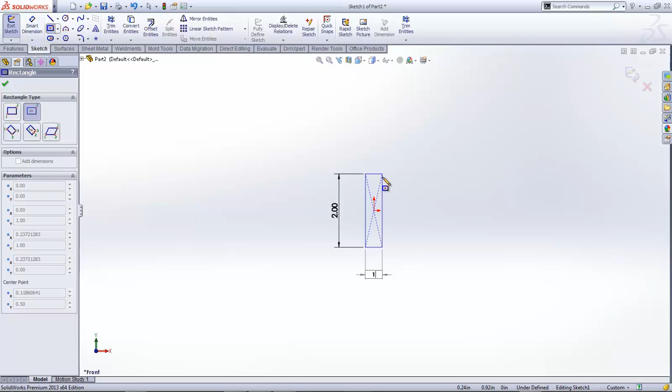So here we are in SolidWorks. I'm going to go in and start creating these profiles. So we're just going to sketch the profile first. The first one we're going to make is the 2x1 that's 1/8 thickness. So I'm just going to sketch a rectangle profile. And when you do this, you're going to want to make sure that the origin is in the middle. It just makes things easier.

When you do weldments, you want to make sure that you always go in and add more points. So when you are making your structural member, you have a lot of different points that you can put the profile on. So I'm just going to drop in some points here, and you can see I'm putting them in the midpoints on the inner rectangle and the outer rectangle, just to be safe, so I know that I have a lot of options here.

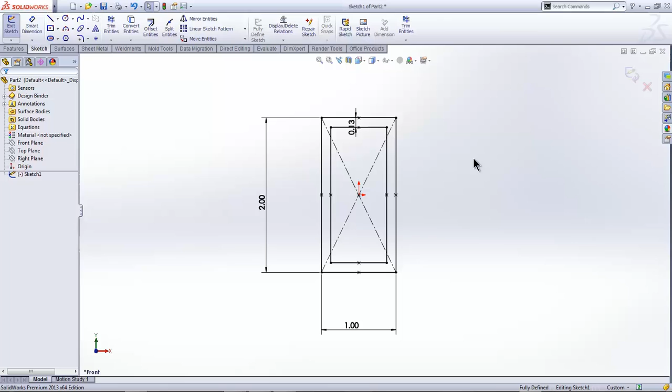Exit out of the sketch. And while I still have the sketch selected, I'm just going to save it real quick. What's really important is instead of a part, I'm going to make it a library feature part. Okay, so then you can save it to a folder location that you specify earlier. So I'm going to save this. I have a base frame, rectangular tubing. I have one made, I'm just going to overwrite it. It's very important where you place these.

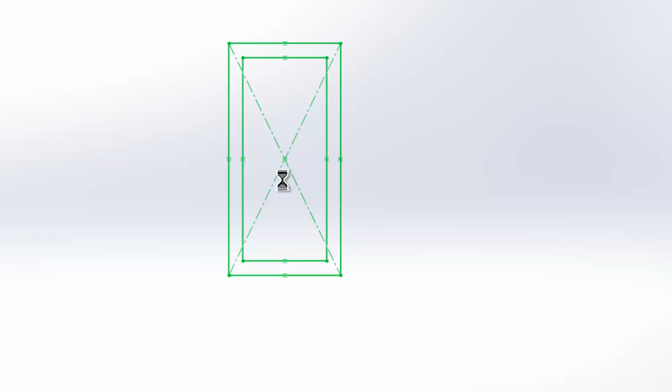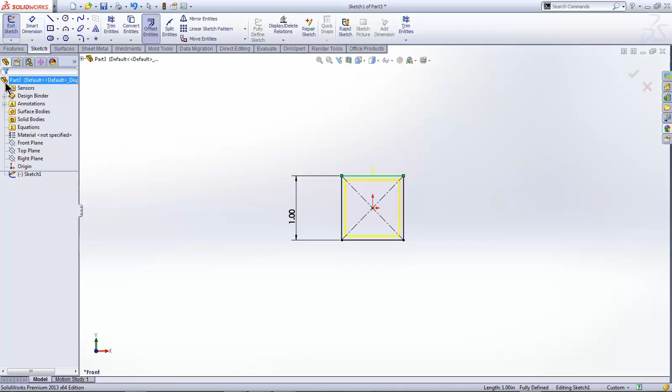So I'm going to start working on the 1/16 inch version as well right now. Essentially, when you make your file locations, you want to make sure that you have a correct folder set up. Basically there's the folder that you'll pick, and then from a drop down you can specify which folder. Then there's another drop down in the weldments that will also pick what type. So for mine it was rectangular, and then I can pick the actual weldment. So that's what I'm doing here: I'm just making these weldment profiles and placing them in a file structure that I've already set up before.

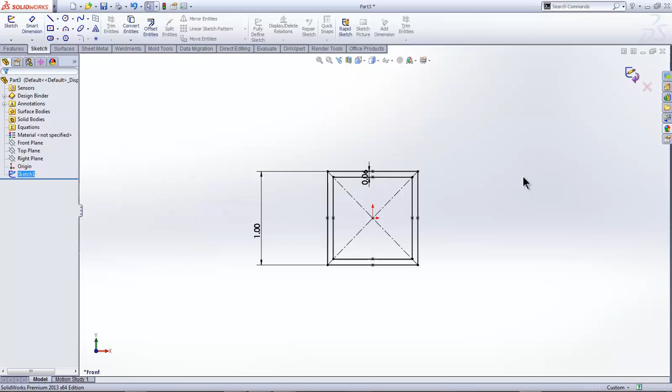So like I did before, I'm going to drop in these little points so that way it's easy for you later on when you want to drop these into your part when you're doing your weldments. So just like before, I'm going to select that sketch. I'm going to save this in the location that I did before. However, I'm going to make sure, since this is a square one, that it goes in the square tubing folder, not the rectangular tubing. So FRC frame profiles, base frame, square tubing.

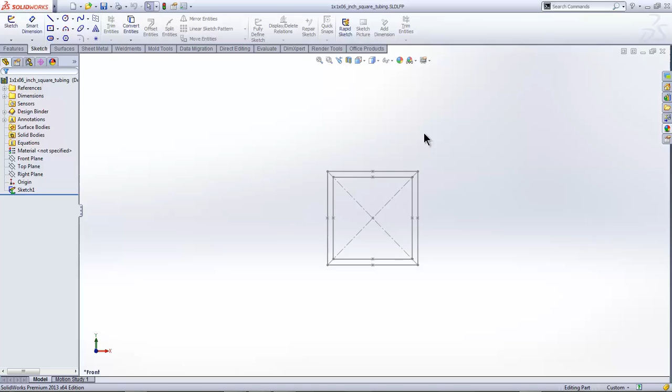I'm just going to name this 1x1, 1/16, just to make it a bit easier to distinguish between the profiles. And you can have lots of profiles in these folders. You're not limited to a certain number. You can drop them in, you can change them, you can have different versions. And this is what's great about weldments: it really makes creating a frame structure, especially in FRC, very fast and effective, and you can modify it with very little issues at all. And you can see that by the end of this tutorial I have an FRC frame that really only took me maybe 15 minutes to make.

So let's go setting up the file locations. If you go in, you'll need to make a folder system so that you can use your weldments properly. The first folder that I created was called FRC frame profiles. This is just where I can put all the different kinds of profiles I want.

In that folder, I'll have a base frame. Now this base frame has folders inside of it: rectangular tubing and square tubing. The individual profiles will go in either rectangular tubing or square tubing. This allows me to distinguish between them, and I can also even add more. Let's say I want round tubing or something like that. I can just make that folder, drop in profiles into the round tubing folder, and use them in weldments.

And then when we actually put our weldments in, we can drop down from the first drop down menu. We'll do base frames, and then we can determine which type of tubing we want to use. And then the last one's just picking what profile you want to use in the last folder. It seems a little complex, but if you set up a similar folder structure, then when you put your file locations in, you only have to do it once, and then it'll be there forever. And it makes it a whole lot more simple.

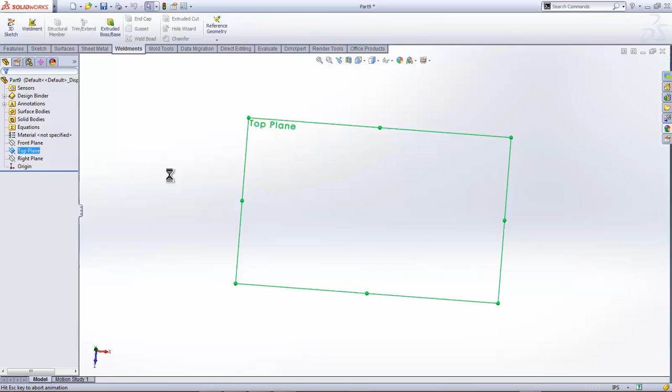So let's start creating the frame. So we're going to open up a new part here. We're going to set the units to inches. And the first sketch I'm going to do is going to be on the top plane. It's just going to be an outer perimeter of the robot. So I'm just going to drop in a rectangle right now and put some dimensions in. So we'll do 36 inches by 26. There we go. Alright, I'm going to exit out of the sketch so it shows the outer perimeter of the robot.

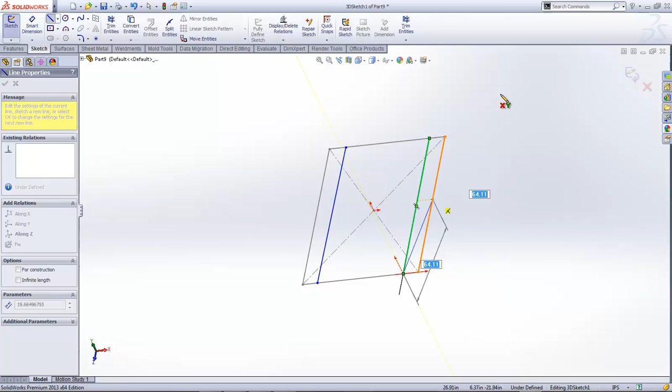Now we're going to actually make our 3D sketch. And this will be the actual frame pieces. So I'm going to put some vertical sides in right now along here. There we go. And we're going to use some of the 3D sketch relations. I'm going to click on these and I'm going to put them along the Z. We're going to dimension them away from the side, from the outer perimeter of the robot. Like that. We'll say about 3 inches on each side. There we go. Okay. Then we're going to drop in our front rails.

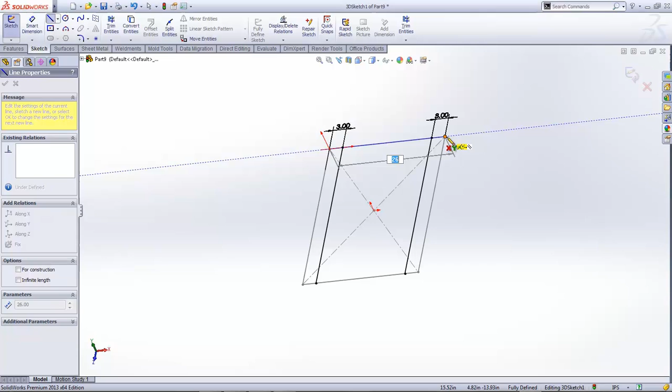I like dropping in these front rails instead of using sketch 1. It makes it easier for me to keep all the frame in one sketch, so that way I can just hide sketch 1 when I need to.

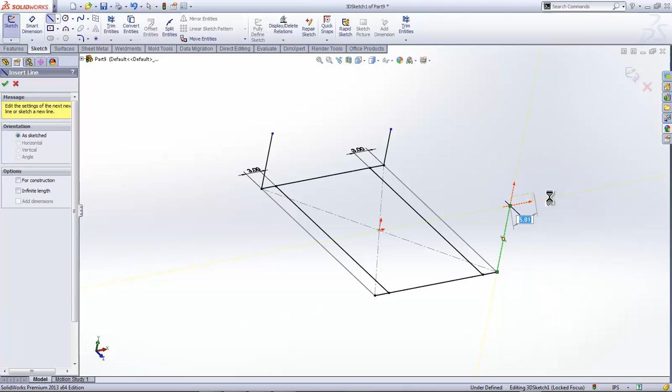Now I'm going to put in some vertical uprights for a second level. This could be for an electronics plate, going to the next level for some kind of mechanism, or it could just be the outer railing system for maybe a bumper mount system. You can do that as well.

I'm just going to drop these in. We're going to make sure that they're all level with each other, so just putting in some 3D sketch relations. There we go, last one.

I'm going to dimension these right now, give them a height. They're 10, so that's a little bit too big. We're going to change this to 5.

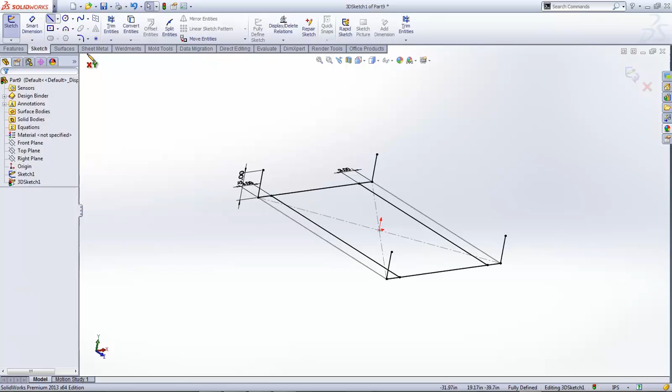Okay, so now our frame is coming along. You can kind of see a little bit of a skeletal structure of it right now. I'm going to drop in these sides. Right there, we go. Exit out of the sketch.

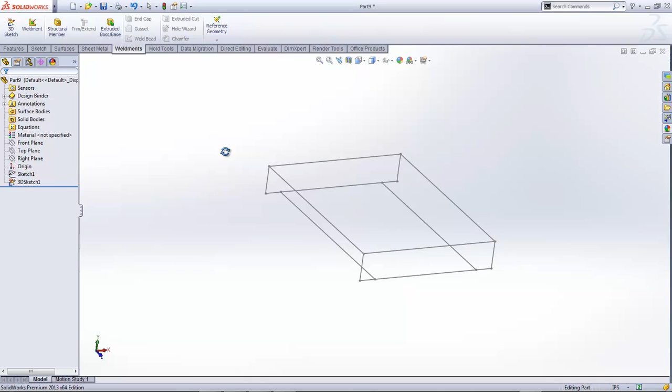Okay, so now you can see I have 2 sketches. One that's the outer frame perimeter, so I'm going to hide that. And you can see this is basically like a skeleton of the sketch.

So we're going to make sure we can see the weldments tab. We're right clicking and then selecting weldments. You can see that I already have the base frame selected, so I'm going to base frame.

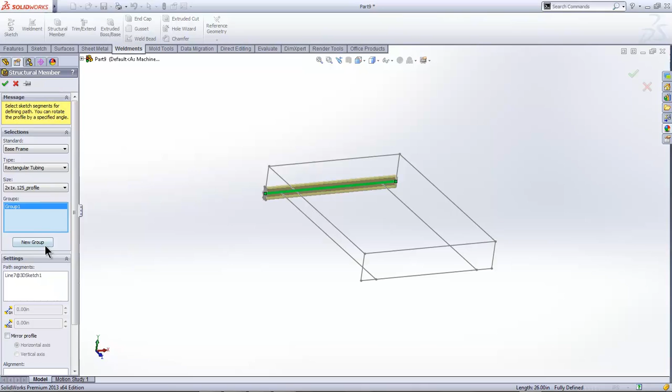Type rectangular. I'm going to use our 2x1 profile we made earlier. And when I click on it, you can see that it's already given me a nice little profile of what we're going to do. If I use locate profile, it'll allow me to actually pick one of the points we placed earlier, either a corner or midpoint, and that'll be where it sweeps down that line.

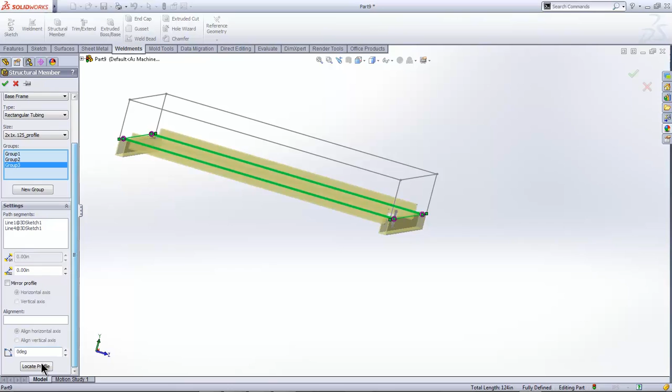Using the new group tool, I can add in another group of the same profile, and you can see it's already cut itself so that it lines up perfectly with the other profiles we already had. So I'm going to use locate profile one more time to make sure everything's good. Looks pretty good. Finish that.

So there's our 2x1 bottom railing system we already have in place. What would have taken several different parts, we've done in one step.

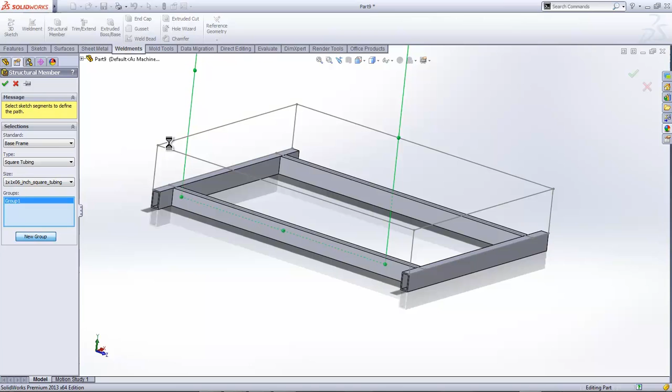So now let's add in the 1x1 tubing. Just going to drop these in. Got to make sure our locate profiles are correct, like that. So you can see the 1x1 was just dropped in.

We're going to do a new group. I'm going to locate the profile on this one as well, right there. So then we have our system starting to come together with the whole robot. You can start to see it come together.

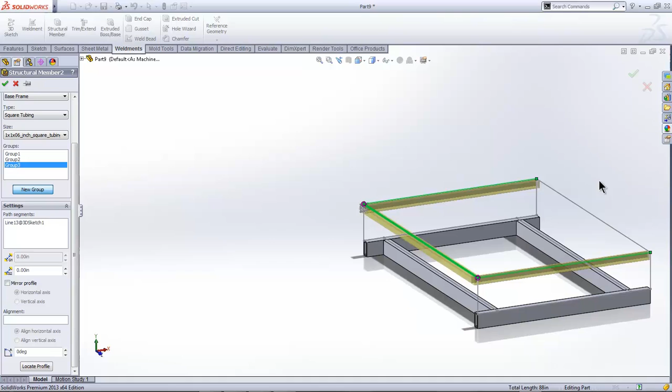So I'm going to drop in these other side rails, make sure the profile is good, and do a new group. Middle one. Looks pretty good, like that. Do that other one. Alright, so you can see we have an outside railing system.

We haven't put in our vertical uprights yet, but this is just the outer perimeter of what could be a bumper mount system or something like that. So let's drop these in each of the corners.

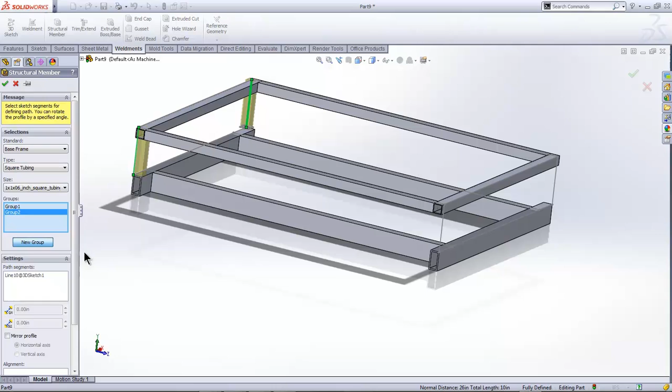You can see how, when we do this, when we locate profile, you can see how important that is. If I pick it here, you can see on the other ones it's not going to line up. So this is a good way to see that you're going to have to do all of these other ones in a different group. It's a little bit longer to do, but you get really fine control over the placement of your weldment pieces.

So I'm going to add a new group for each corner. Just make sure it lines up, alright. Okay, profile right there.

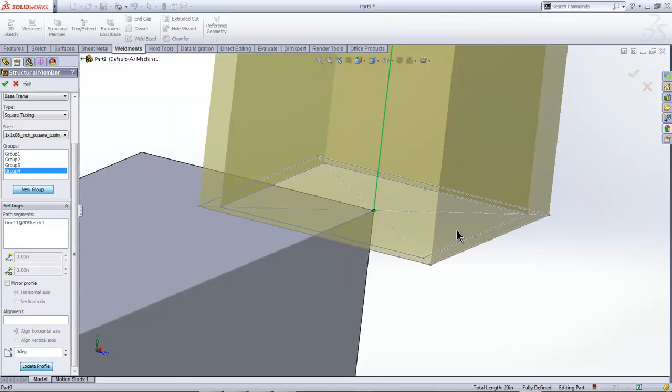Okay, new group. I'm going to do the last one here. We'll locate that profile as well, that corner. Okay, so now we have all of our vertical uprights in, but we're going to do a check and make sure everything looks okay.

But just before we move on, you can see if I do a 3D sketch, I'll hide that. Alright, so look, some of the bodies here are overhanging. So you can use the trim extend tool to cut off.

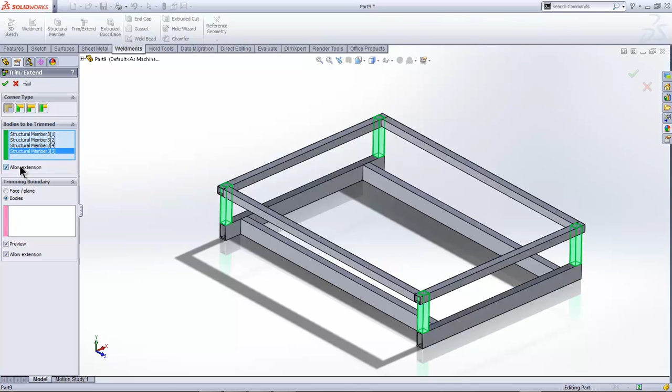So those are the bodies that are going to be trimmed, and I'm going to cut them around these other railings. You can see right now that I already have an overhang, so something that you wouldn't have noticed before. This is a good test that I did so you can see when I put in the weldment profile wrong.

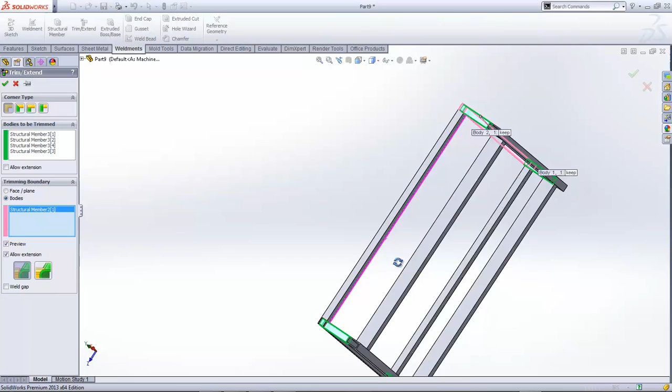That's not aligning the way I want. It's overhanging a bit on each end, which isn't good. That's not what I was looking for when I do this. So I'm just going to trim these real quick, like that.

Extension off and green check.

So you can see it's cut those side pieces, but that top rail system we need to fix as well. Let's go in and troubleshoot what's going on here. You can see it's overhanging, and that's because these side rails weren't placed correctly.

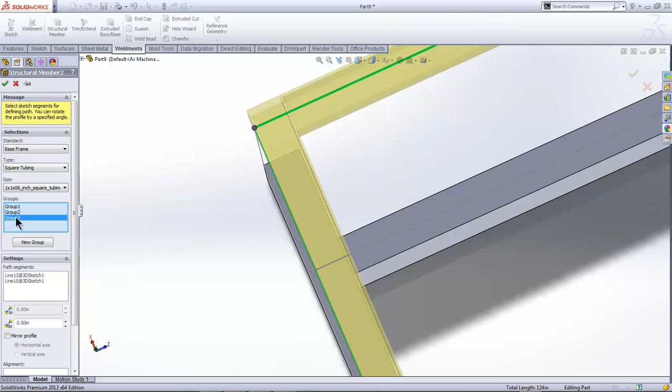So what we're going to have to do is go in, edit, and look at the groups. It looks like group 3 was put in incorrectly, so we're just going to clear it and start over. We'll drop that in and make sure you pick which hole you want correctly.

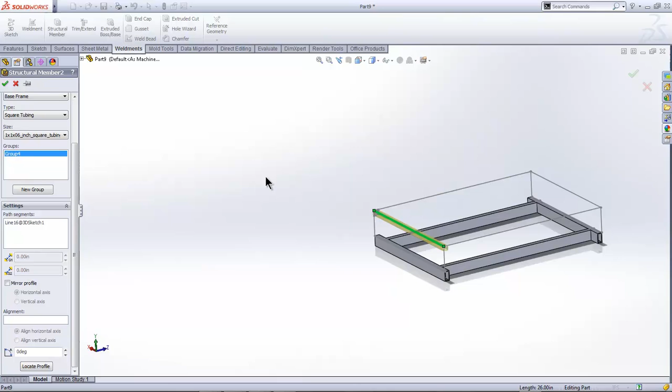You're going to have to zoom in. We want that corner hole right there, so we'll locate the profile and put that in. We'll just make sure it looks good. Okay, that's even. Our trim extend is failing because the rail system that we had before is now gone.

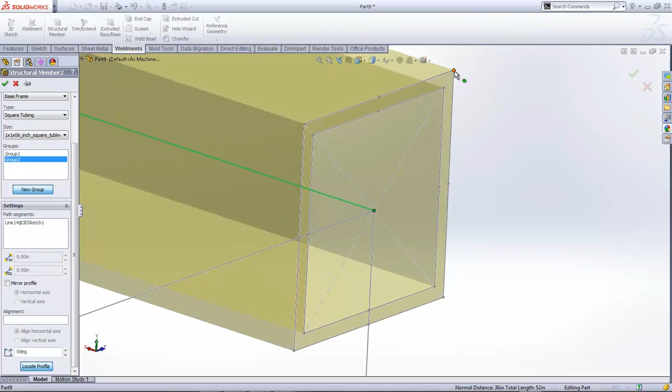So we're just going to delete that real quick. Let's edit that again, add in a new group, and start putting in the other profiles, making sure they're all good this time. I dropped in the side, do a new group.

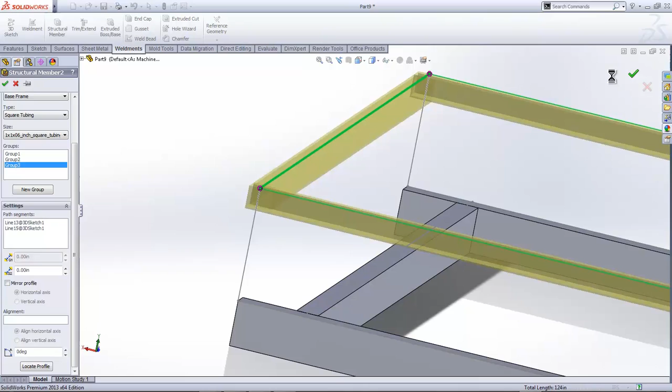Now these were the ones that were incorrect the last time. So when we locate the profile, we'll make sure we pick the right one. There we go. You can see now that it seems like it's still overhanging, so we've got to figure out what's going on here. Green check.

See how we still have that overhang? So we're picking the middle one, and this is where it comes down to picking the right points for your profile. That's why we added in more beforehand, so we have more options when we want to drop these in.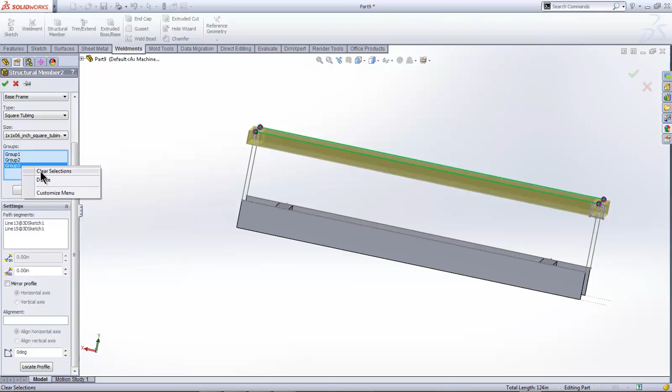So we're going to go and look at which group's failing. It seems like these were once again incorrect, so we're just going to delete that and drop them in one more time.

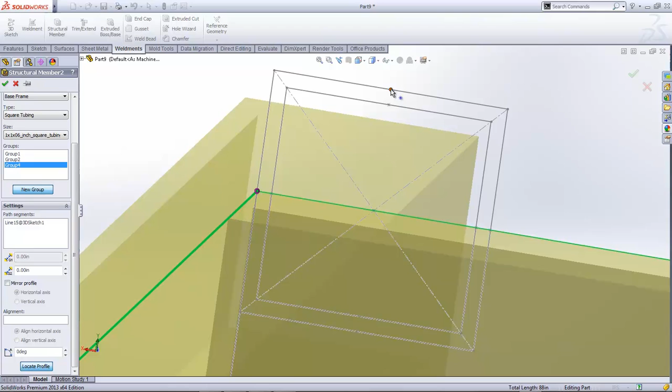We'll do this side one, and when we locate the profile, we'll make sure we pick the right one this time. That far one - and then we'll try and see that it's too high up, so you can get a better angle by moving it around. You can see, alright, that rail's too high up. I'm going to need to change that profile again to right there in this corner.

Okay, that looks good. We'll do the new group, add in the other one in the other corner as well. Right there. Alright, that looks pretty good. We'll check this. Alright, now you can see all of it lines up.

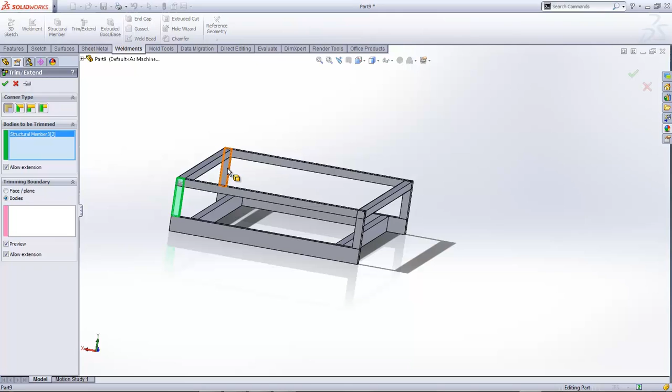However, the bodies weren't trim extended, so we'll have to do that one more time. Just click these uprights, and I'm just going to click these bodies so they cut around those bodies.

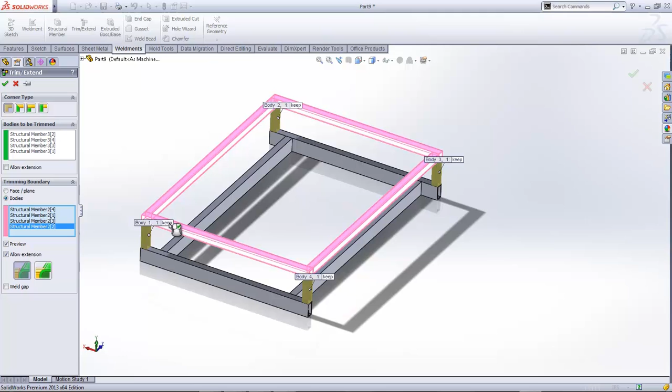I'm going to allow extension, and it should - there we go, it's going to fail because something's going on, and it's saying that one of the bodies isn't being kept. You can see that green one in the bottom says discard. I'm going to make sure that says keep. It gives you a nice preview of what it's going to look like.

Alright, so now we have the frame all done. This was done really quickly, and we just dropped it in.

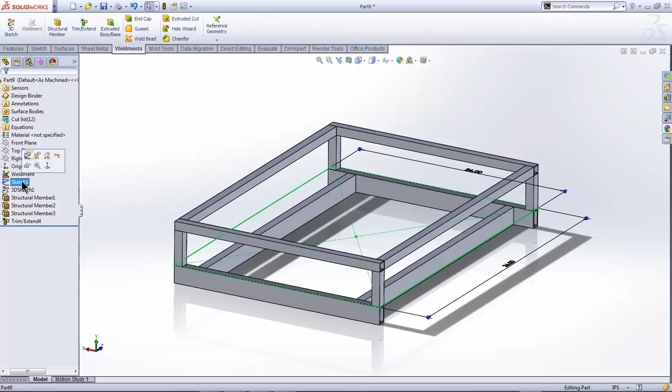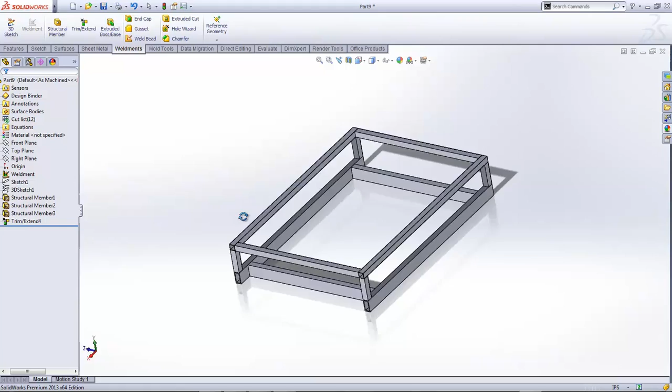Now, one of the cool things about weldments is you can actually modify your sketches in the beginning, and it'll allow the part to update. So we're going to go into sketch 1. Let's say you're designing, and we don't want to do a long base anymore - we want to have a wide base. We've got to inverse these dimensions, and you don't want to go in and change every part. So you just change the dimensions in your first sketch, make sure it's rebuilt, and the model's already gone to a wide configuration.

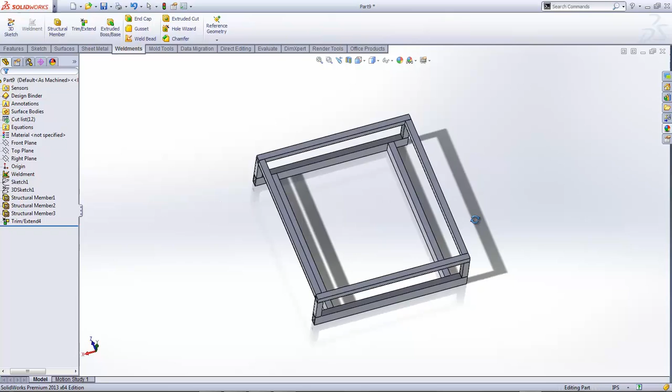So in a process that would have you going in and changing each individual part, hoping your mate relations don't break, it's as easy as going into a sketch, changing those dimensions, and as long as you have the design intent in mind from the beginning, all your other weldments will update. I'm just going to play around with the dimensions as well. If you want more of a square shape, you can do that as well. And nothing's failing because all of it's defined from that original sketch.

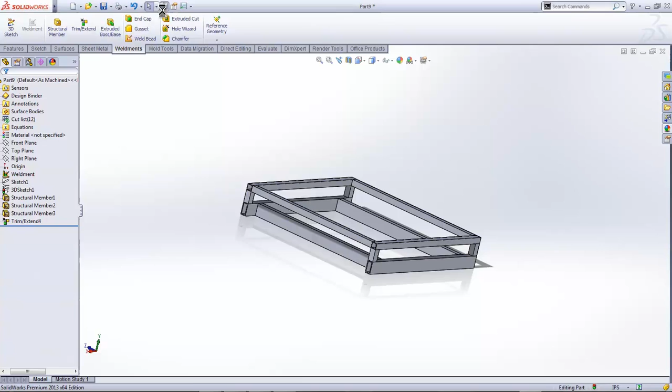You can change the length of your vertical rails as well if you want them closer to the frame, or farther away if you want. Let's say we want to put this at 12, 10, there we go. Rebuild, and you can see that's a much higher frame, but you can also do that. Nothing is failing because everything's defined and related to that original sketch. This is a really great tool that you can use, especially to get a robot done quickly.

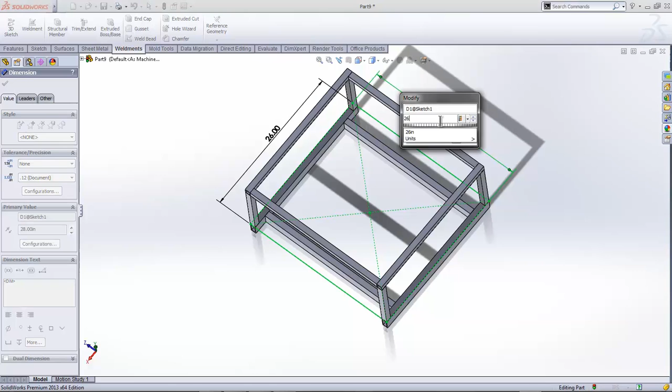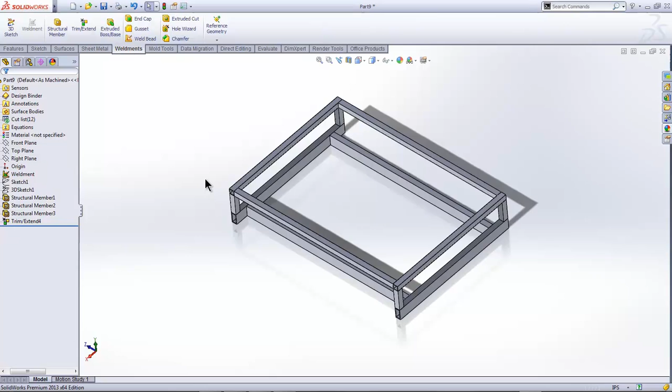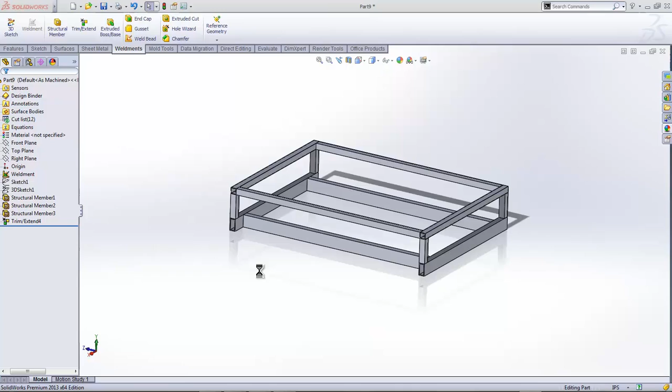So let's go back, we'll just play with some of these dimensions again. We'll do 25, 26, 36, so we can see what this looks like with a wide configuration. And then we'll change it back to our original, so we'll do 36 here, 26 here. There we go, alright, and then we're already back to our original frame. So we've gone through several different designs in just a couple of minutes. This is what's so great about weldments, is that it allows you to have this great functionality to design robots very quickly. And then you can save this as your frame that you can use in the assembly to assemble your final bot.

Final design results: we're able to assign a material to the entire base frame. We can also add mounting holes and cutouts right to the side rails for tensioning systems or bearing placements for when you want to put in your wheels. This is a great FRC frame design, you can make it very quickly. I can make one in about 15 minutes. This one took me a bit longer because I was going through and making sure I had everything done and recording over, so that took a little bit of time as well.

It's easy to modify, you can just change that sketch and change the length of your entire frame. You can also modify your profiles if you want to go from a 2:1 to a 3:1 or something like that. You can add sheet metal plates as well, which is really cool. I've used it instead of having a frame that's welded together, I've had a frame that you can bolt together using different triangular cutouts, or you can have L brackets, anything like that. You can just add those in using the sheet metal tools in SolidWorks, and it just adds them to the cut list folders. You can get an accurate frame weight, which is great, especially when you assign the materials.

You're able to save bodies out as different parts. So if you have a side rail in this part that you've made your base frame in, you can actually save that body out as a side rail, and name it side rail, FRC base, 2013, 2014, whatever year you're doing it. And then as you modify the original part with the frame that we've made, it'll update that child part with the side rail. So if you increase the length of the side rail in this frame base part that we've made using weldments, it'll change that child feature part as well. So it's a really great tool.

So here we have the final frame that I put together. I've dropped in some cutouts for the tensioning systems, a hole pattern on all the members as well, just so it's easy to mount stuff to. If you look in this cut list, it'll show all the different bodies, and we're going to update it so it'll actually put in. SolidWorks is able to recognize duplicate parts, so you can see it's grouping the two parts that are identical together. It's just saying, I know all these parts are identical, I'm putting it in a cut list item. I've assigned a material as well to the parts, so I can do a mass properties, and I can actually get a rough estimate of the weight.

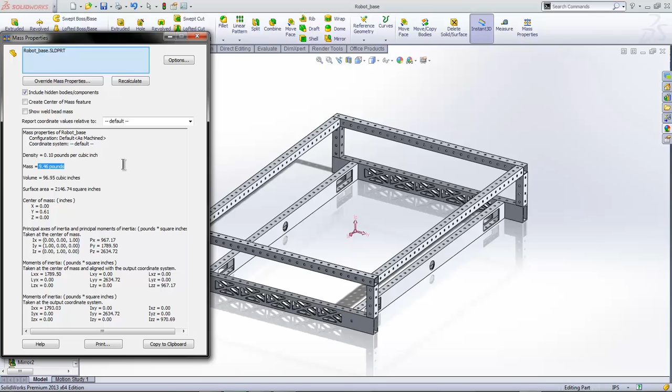So it's 9.46 pounds, just the frame, and that's not including wheels or anything, so that's just the frame weight. So you'll have to actually get an accurate weight in your assembly. I've dropped in a belly pan as well, just using sheet metal. I didn't do any cutouts on that, just kind of dropped it in so you can see it.

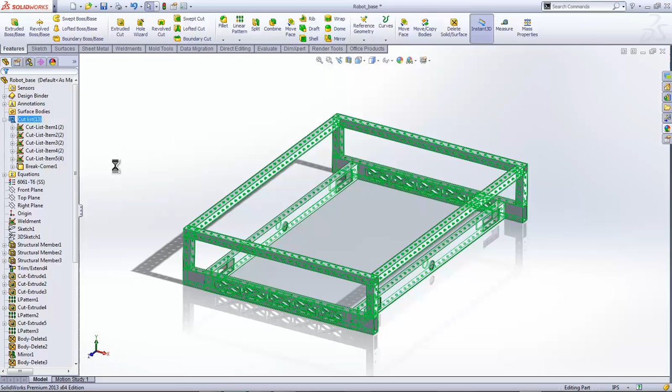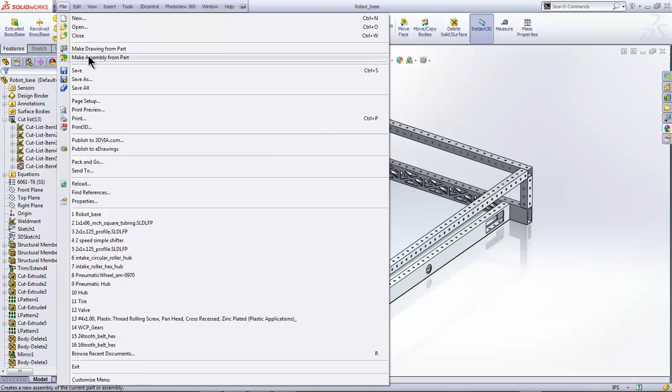When we update this, you'll see that it's put it in its own cut list item as well. Right there, it's one. And you can put a bolt pattern down on that so it all mounts together. And you can drop this in your assembly. So another really cool feature that you can do is, I'm just going to save this real quick. Let it rebuild. Okay. So you go File, you can do Make Assembly from Part, Assembly.

Just open Documents, you'll see that it's going to be dropped in right there. Green check, and there we go. Let me rebuild, so there we go. So now it's dropped in the whole frame as one part in the assembly. And now, if you do a similar manner with your mechanism, you can do that as well, just drop in your mechanism. Or you can drop in transmission, drop in wheels and everything like that right in the assembly.

So when I expand one of these out, it's its own body. So the cut list, and then they're grouped together, and there's two bodies in there. So each part is actually a body. And if you right click, you can actually go down and go into Insert into New Part. So now it's in its own part, and I can save this as its own rail system. I can give it a name. I can keep it in the same folder as the base, so it's all more organized.

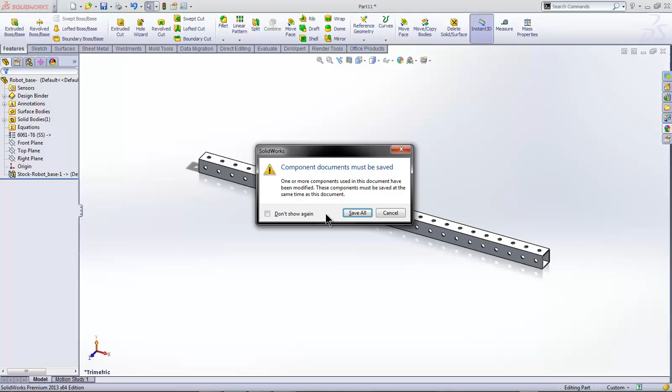So I'm going to do top rail robot base _1. Alright, save it. There we go. So now that part is now updated. It keeps the material as well. I can just do a weight on this part, and that's now saved as its own part.

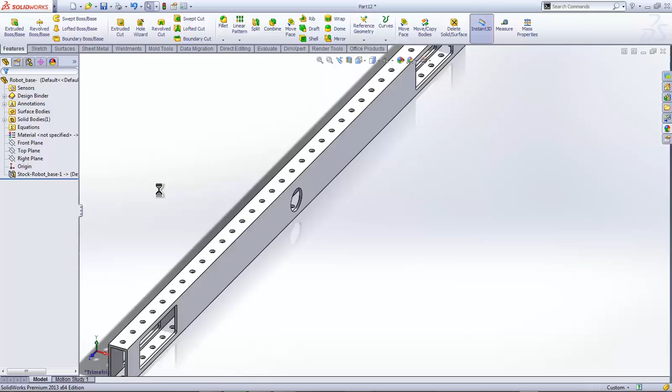So let's do a part that we know that we can update and have it change and modify. So we're going to do one of these side rails. We're going to do the same exact process, but insert into a new part. You can see it's kept the material as well. And we're going to save this and do side rail_robot_base. There we go. We're going to save all. Okay, so now that rail system is saved.

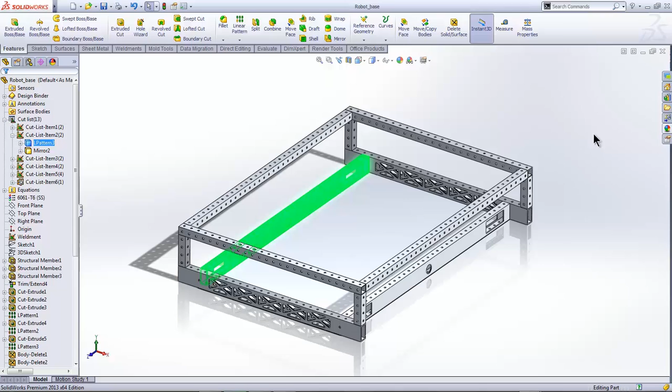Now if I exit out of this and go back to the part, let's say I want to modify my original sketch, because we're in the middle of build season and we're like, great, we need to have a wide configuration. So let's change this into a wide configuration robot. We're going to green check and we're going to rebuild. And there we go. So now the robot is now in a wide configuration.

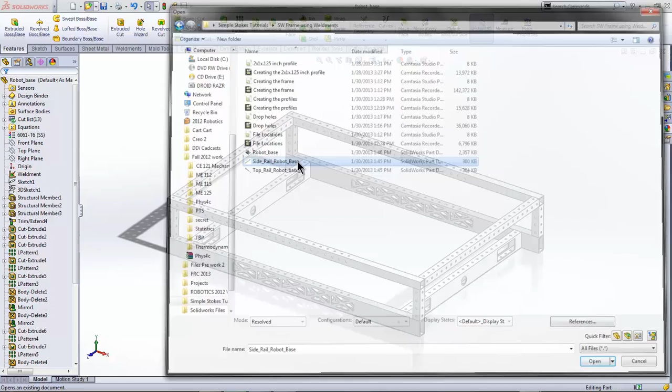So if we save this and go back into our side rail part, let's browse that folder where it's at. Well, there it is, side rail. I'm going to rebuild. You can see now it's gotten shorter than the original part. So let's go and we'll measure and we'll check the length on this. So you can see it's 26 inches in the wide configuration.

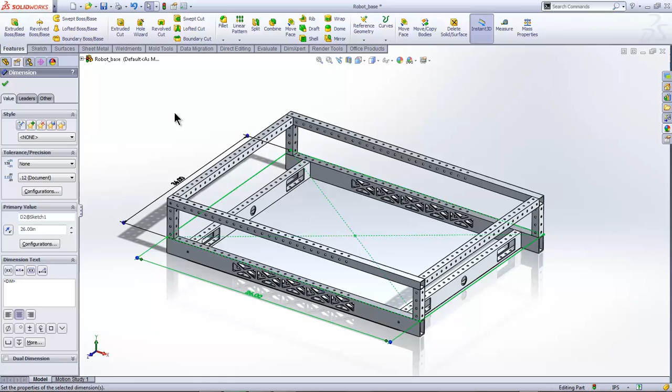So I'm going to go back to the robot base. Alright, let's say we want to go back to long. We found out wide's not going to work for us. So we're going to go back to the long configuration. Rebuild. There we go. So now the bot is back to its long configuration from going to the wide one. So let's go back into that side rail. We'll notice it's gotten long again, and we'll just double check that using the measure tool. So now it's 34 inches.

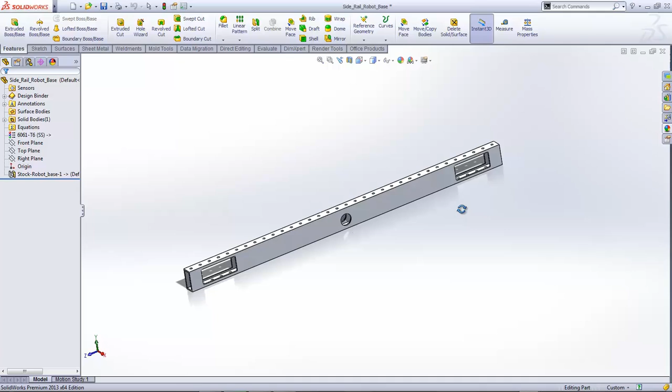So you can see how great of a tool weldments can be when you're designing a frame. It's really simple. You make a 3D sketch, you have some profiles that you just use as a standard, and then you can have one person design a robot frame really quickly and get it done fast.